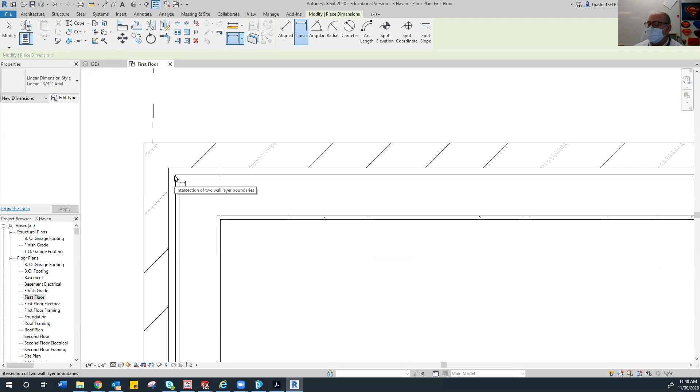So I click on that point right there, and I'm already into the dimension line. Now I go all the way across to the same point on the opposite side. That is called a dimension chain. The extension lines are the vertical lines coming up from the house, and the horizontal is the dimension line.

You need to visually pull that up so it's about what looks to be 3 inches, or maybe 3 fingers worth on your screen. So you put 3 fingers on your screen about that far away from the closest wall. That's an eyeball thing—no one measures it. So about 3 inches, about 3 fingers, plus or minus a finger. Some of you have fat knuckles, you pop your knuckles a lot.

Okay, so that tells me I have a distance of 81 foot 2. If you're doing brick or stone, that's good—you want an even number. If you're doing siding or stucco, it doesn't have to necessarily be even. They can work that out with that type of framing. But for masonry, they want it to be that way.

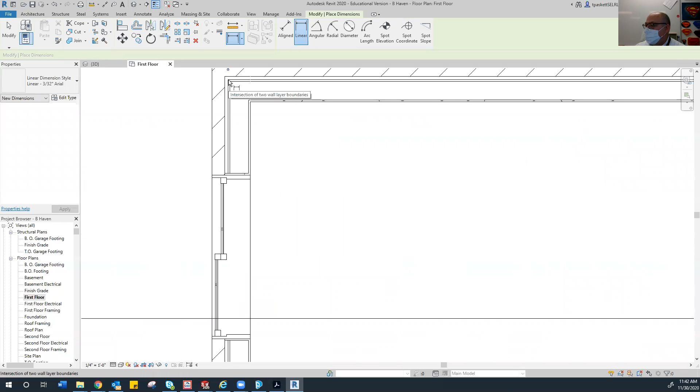Now you do that on all the other sides as well. I would not include the porch in the overall. So if I'm going to do this side here, I'll get my point, start with that side, come all the way down, not to the porch, get that sheathing line, and then this one will come out again about 3 inches eyeballed from that side. The porch is dimensioned separately on the next run of dimensions. Then I would do the same across the front and on the right side.

Now, because of time, I'm not going to do the whole house dimension—it does take time to do all that. I will show a video, I'll make a video this afternoon and do the whole house for you. But for right now, I want it to be a sketch there. So again, this is your overall dimension—it is used by the excavators and the foundation crew. The excavators then take that number, in this case that 81 foot 2. This is a very large house.

They take this number and add 6 feet to that, 3 feet on each side, and dig a hole. That hole must be 3 feet wider on each side of the house so that when people are down there working on the foundation, the soil doesn't fall back in on them and kill them.

If you watch your news feeds for Utah, it averages 1 person every year that the excavated dirt falls back in on. Last year the guy was very fortunate, it got up to his throat. It did crush a lung, but they were able to get him out of the dirt. They did not follow OSHA requirements, did not have bracing, and that happens.

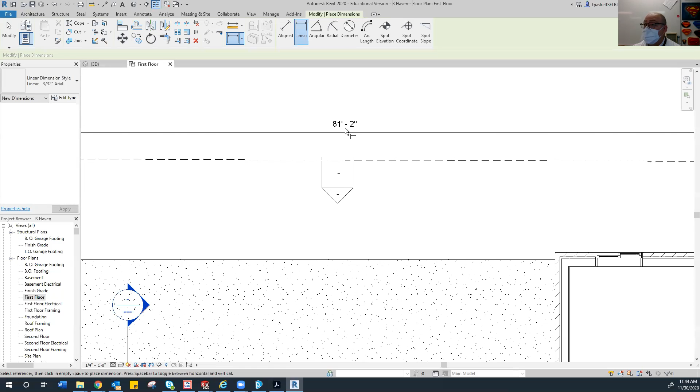We want to make sure we're doing our part of the drawing so that it's not on us. We don't ever want it to be on us, okay?

Now the next set of lines we do is for all the corners, because the foundation guys need to know every time they need to change direction for the foundation, and the framers need to know how long the wall is, because each wall is built independent of the other. So this is how easy it is to do a string of corners.

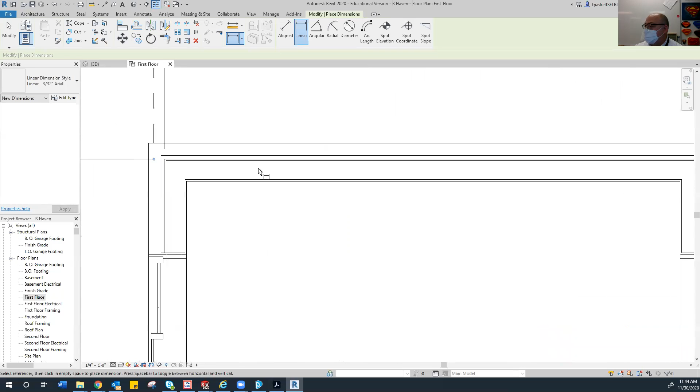I come down, I start with my exterior sheathing, go to the next point. I missed that one, it looks like. Go to the next one. As long as you don't hit your enter button, which is your right click, you can just keep picking points.

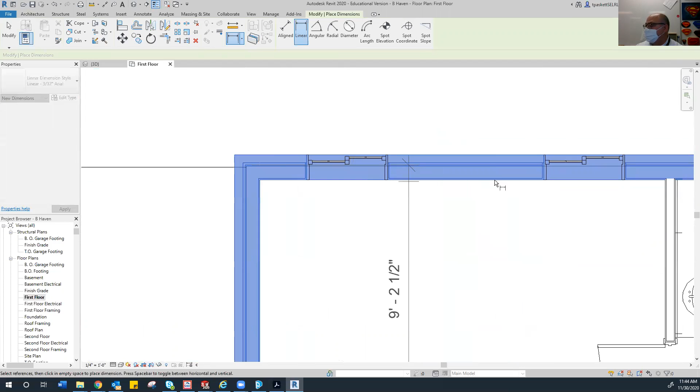Your dimensions will flip around on you doing this - don't panic. There's my last one. And then when I pull this whole string up, it comes up so it's just underneath your overall, and that's a full string.

We want as long of a string of dimensions as you possibly can every time you dimension a wall. So all the way across there. Okay, now we know that this wall is 13'1" from sheathing to sheathing.

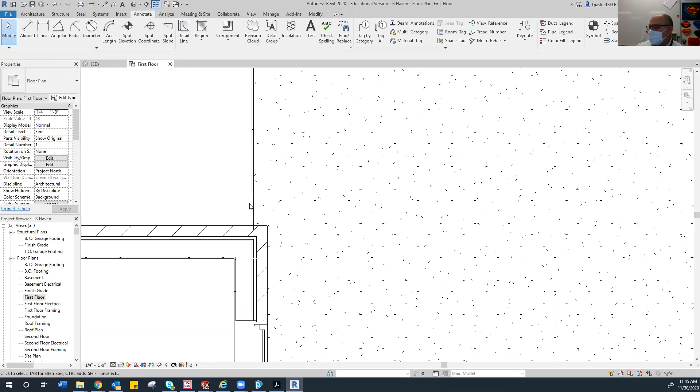Now I noticed there's a half inch here, and when I was working on this I also noticed that this guy was on the face of stud. So I'm going to modify this dimension right here. I can find that dimension. Oh, I see what I did - that's not dimension, I'm good. I did okay, I thought I screwed up.

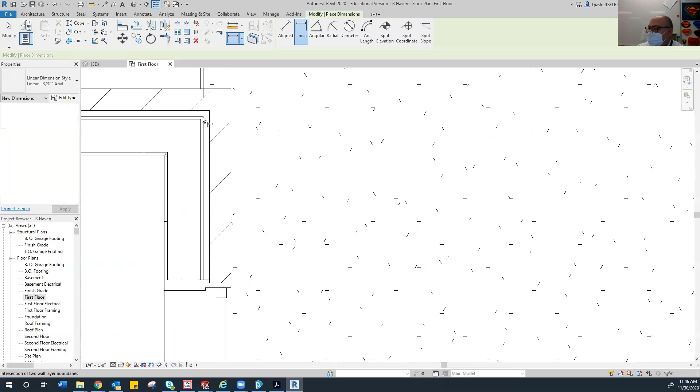Next, if you've got an area like this right here, I'll show you that right now - that's going to be pulled in separate. So you might have to go in and add information that's needed to build out your walls. So that would be a dimension that would sit here.

And if these walls line up, you're good, but if they don't, then you'd put another one here. If you just put the one dimension, it's implied that this wall lines up. Now there are some people who say, I can't take the risk, and they'll just go ahead and put the other one in. I want them to line up, so I just let it go.

Now I also have a window in this wall, and I have windows along here, so your third row of dimensions is for windows and doors.

Okay, now this is where it gets to be a little up to you how you want to do this. Some firms will dimension to the center of an opening, like a door or window. Others will dimension the outside. I like to do the outside - it saves me work later on with sizing out my doors and windows.

So this is what I would do, and notice I'm now in the modify - I still have my dimension. I can switch back to annotate, still active. So it's active in both the modify and the annotate at the same time, so you can get to the dimensions either way.

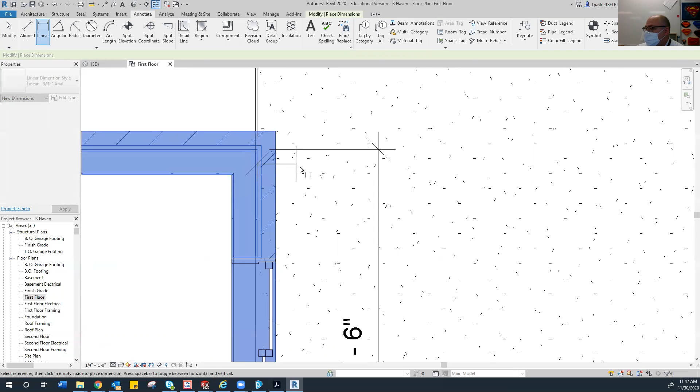So coming in, I'm going to pick up from where I was started. And when I do windows, I really don't like clients changing window size, and the reason is your windows have to equal 10% of the square footage of that room for light. If they mess up the size of those windows, they may make it so the house doesn't get occupancy, and so I try and lock them into one choice.

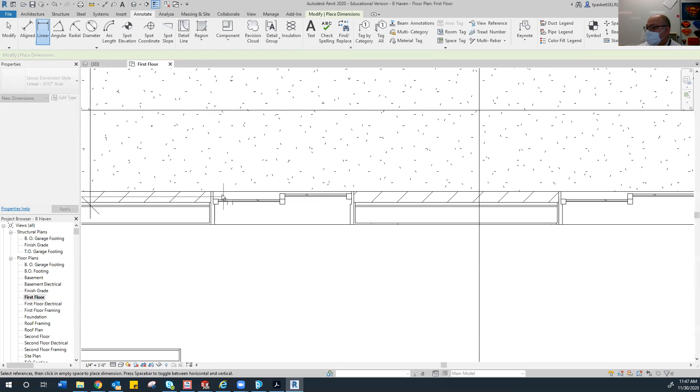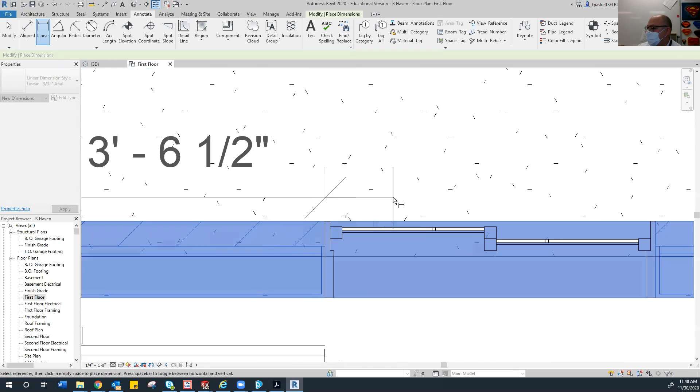When I come across to do a window, I'll go to the line on the outside, pick both of those, and keep coming along to get the other ones. I may check to make sure I got them. It's kind of a faith drawing exercise, a little frustrating. Back up to this point, over to here, and going across the outside edge.

As long as you don't hit that right mouse button or the enter key, every time you click an endpoint, they're going to be added. Does that mean you're going to be perfect? Absolutely not. Some of you will have to start over. That's a little bit of a downer, but that's okay. Like I just messed up. Oops, that's okay. Messing up is good.

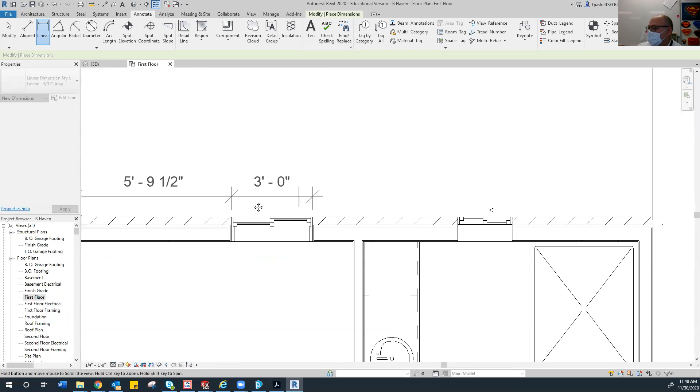I can try to fix that, because you'll need to know. This is a little window in the bathroom, so it's very tall and high up. Oops, I really messed that up, I just lost the whole string. Yep, I hit my right button as I bumped the mouse.

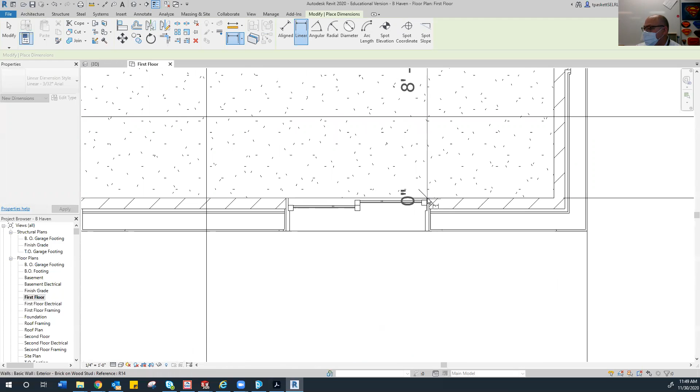So like you, I have to start over. This is where you want to take your time a little bit. Don't rush this. If you're worried about it, and you aren't doing teaching, it's a little easier not to make mistakes. I usually kick these off pretty quick and easy, but occasionally I get talking and lose my way. Okay, here we come again.

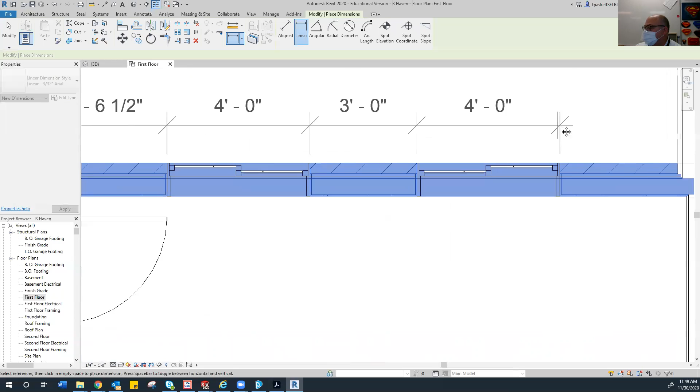If I miss an endpoint, that will kick me out as well. If you double click your left mouse button, that will also kick you out. But once you get the hang of it, it's actually kind of fun.

And it's a lot easier than the way we used to do this. In CAD, we used to have to do each piece separate. That was kind of a real pain, to be honest, because you have to make sure your strings all line up.

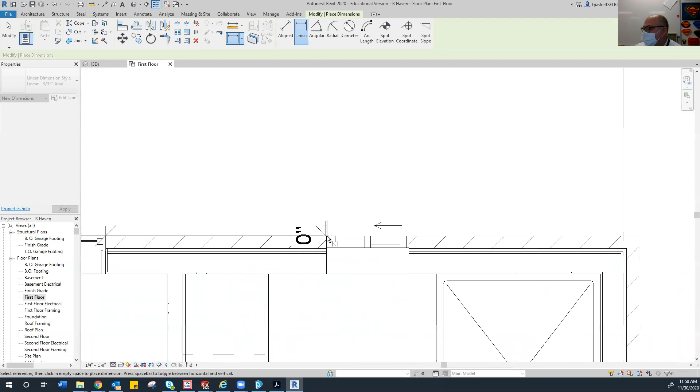Oh my gosh, well, we'll call that good for now. All right, so I messed up, so let's do some fixing. Okay, I at least got my string started. I messed up over here because that guy's not really there.

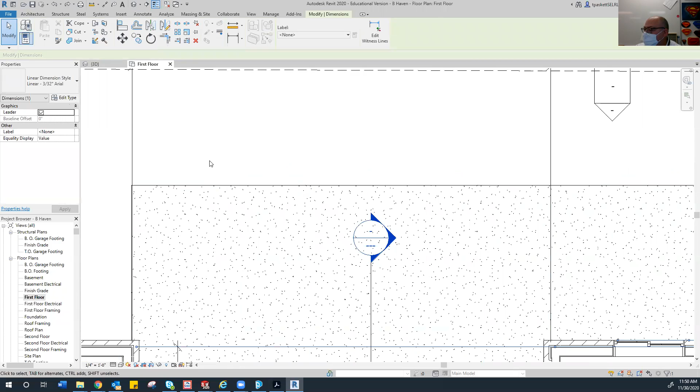When you place your dimension strings, you can take and modify them, and they are all linked. So when you want to make a change, you can move them all at once, if I'm careful. What am I locked to here? Somebody's got me locked. No, we're not locked.

So I'm going to take this middle line here. This is what lines up with where you're at on the middle one, which is kind of a weird deal. I should just be able to move that whole thing. It is not cooperating today.

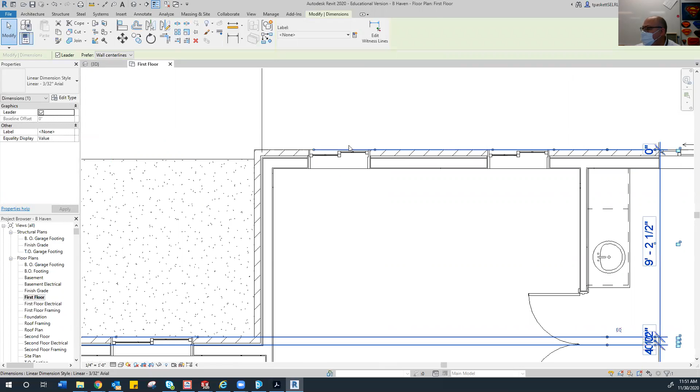That was really getting frustrating and getting bummed. Boy, that is frustrating as crud. I want to drag those up, and they keep flipping over here to the edge. So I've got to figure out what I'm doing wrong here. It's always fun when I do something wrong.

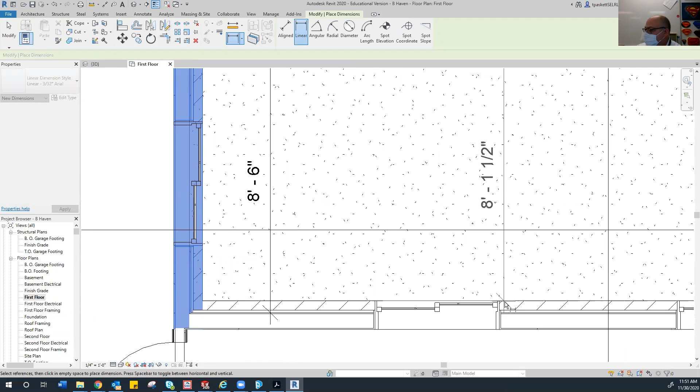Jeez, that is weird, okay. I don't want to do that again, but I'm going to do it again. So I'm just going to start over because it's frustrating me. What's happening is when I hit this wall right here, I'm inverting the dimension. There's a dimension going vertically here that I didn't want, and it did, and that's what's caused my grief.

So a little bit of knowledge doesn't save you. You can have all the degrees in the world and you still mess up in life. Okay, so I'm going to pull this string up to where it goes, and I'll let that one be, and then I'll start another string, and so I can fix that problem.

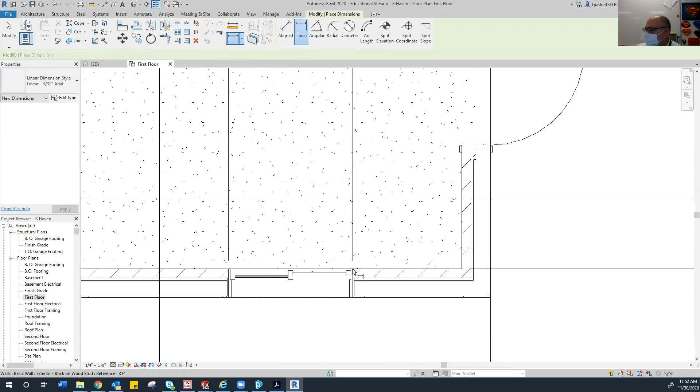If you need to do this, there's no shame in it, just because you have to break it up. What you want to do is just make sure you line them up so they're all on the same string, and you're good. You just carry that across, and that's all your doors and windows.

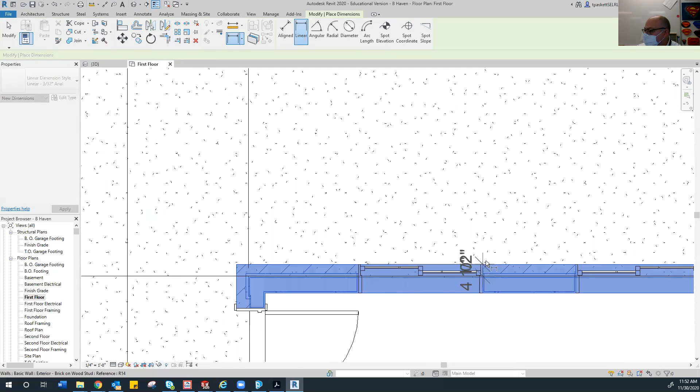I'll go ahead and finish that one out now, so we can keep a full string going in our discussion as we dimension. This is probably the most important part of your drawing, that these dimensions are all in there. Now, in the good old days, before you guys were even thought of, because your parents weren't, see, there's my dimension change.

So I'm going to stop this one here as well, and we'll pick up again. Actually, that's probably enough—you've seen me do it 14 times now.

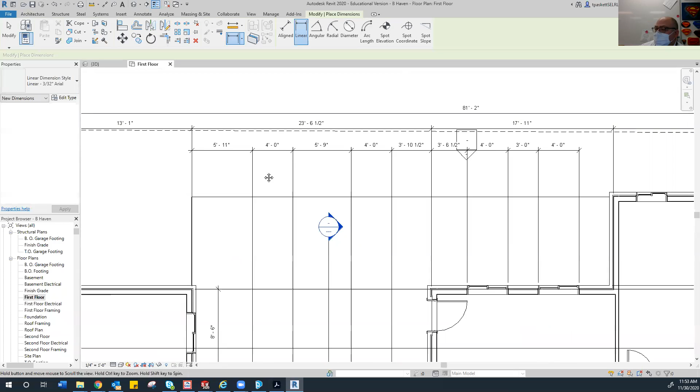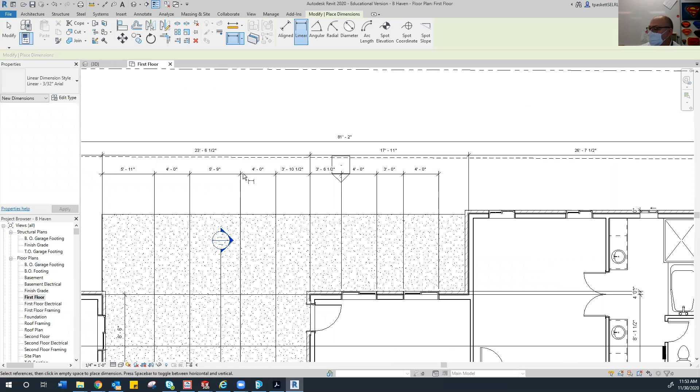In the old days, we did this by hand. When you did a string of dimensions, say 81'2", the next one down had to be added up and equal 81'2"—it had to equal. And the next string had to equal the first two. We can trust CAD a little more to get that right for us, but you still want to make sure nothing looks odd in your dimensions, that you haven't missed a line. If you've got half inches you're not sure about, check those and find out why they're there. If it looks right, you're good, but just verify, okay?

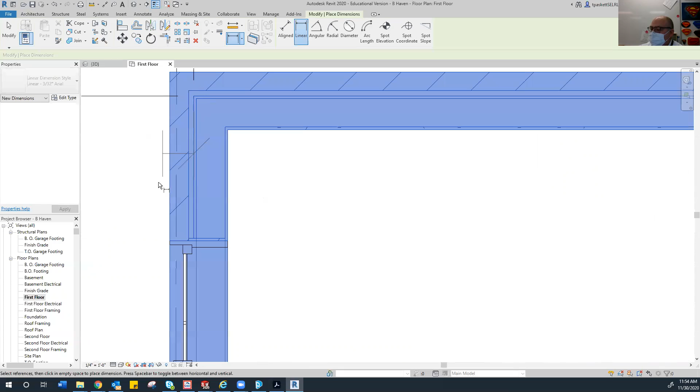So you do these three strings all the way around. Here I've got my overall dimension. There's no corners here, so I won't have three at this point—I'll have the overall, and then I'll go right to the windows or openings. I'm going to do this side because there's another level, a 4th level, that we're going to talk about real quick here as we go.

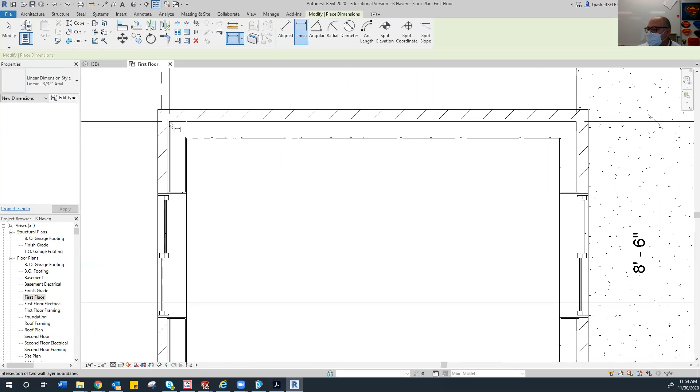Forget those short windows. What's happening on that one, so you know, is that window is above the cut plane line, so it doesn't want to show here. I've got to fake that one out a little bit—I forgot about that guy.

Okay, so this window here is above the 4-foot point where my house is cut through. Your floor plan is a horizontal section cut, and everything above 4 feet doesn't really exist, but you can see it. So I'm going to pull these out, and I'm going to stop here for a minute.

I'm going to go into my architectural tab and use my model line. I'm just going to grab a line right here off of that. And you want this—sorry, let me change this—not your center line we used on our property. We want it to just be a line, because if we forget to delete it, we don't want it to print. So there's a green line there.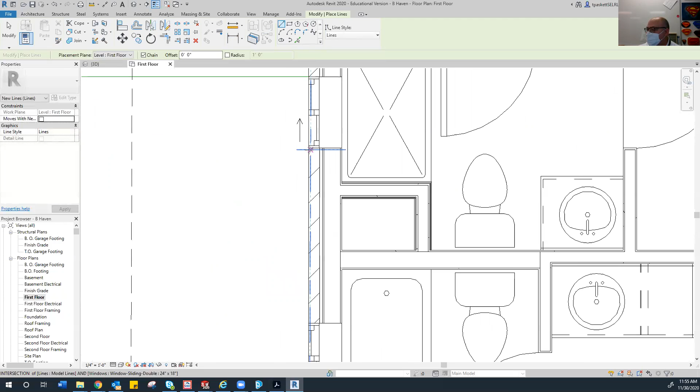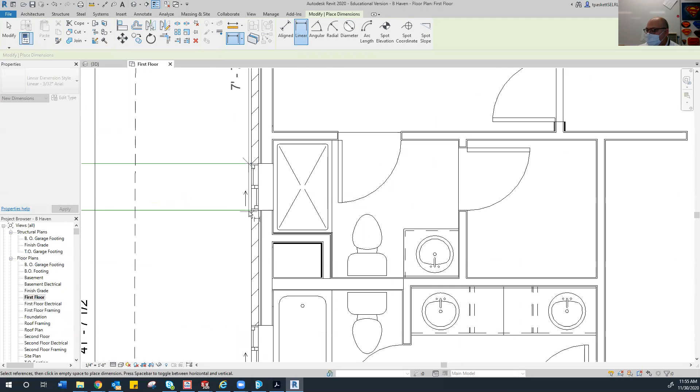And I'm going to bring a green line on this side. So now those lines exist because these are at the floor level—they're not at the window level, they're actually the floor level. So I can go back to my dimensioning, pick up where I left off, pick up on the line, and now I don't have that issue. I can pick up the next one using the guidelines and not the windows.

I've got the same thing here, but I'll just jump down—actually, I'll call that good. Line those up. So that's how you fix it when you have these bathroom windows up above your head, okay? Now I usually go back through and make sure I delete those out, but if you don't, that's fine—I'm not going to print it, so don't stress over it. It's not worth the anxiety of it all.

But occasionally we might want to put a 4th line in, and that would be if you've got a wall coming to the outside. I do not dimension this way, one, because I think it's a little too cluttered, and I'm asking different construction crews to do different things. The outside walls are done by the main structural framing crew—they'll build these walls on the floor, tilt them up, and then move to the next house. The secondary framing team comes in and does the next framing, and they're maybe a little less proficient, a little newer on the job, so to speak.

But we can hide mistakes on interior walls that we cannot hide on an exterior wall. So a lot of times a general contractor will have different framing crews. What some firms will do—and again, if you want to dimension this way, that's your choice, it's not what I do—they will dimension a string that goes from the corner to the wall, and you want to set it up so you're dimensioning to the center of the wall. This is why I don't do it, because it's a different setting, and I'll just eyeball it maybe if I can get that to work, and it won't do it that way.

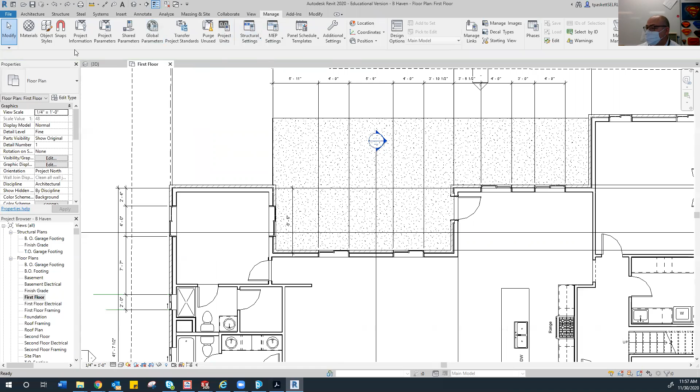I'm going to go into my additional settings, go down to your temporary dimensions. What I want to do is set the walls to go center core, and on the openings, go center lines as well there.

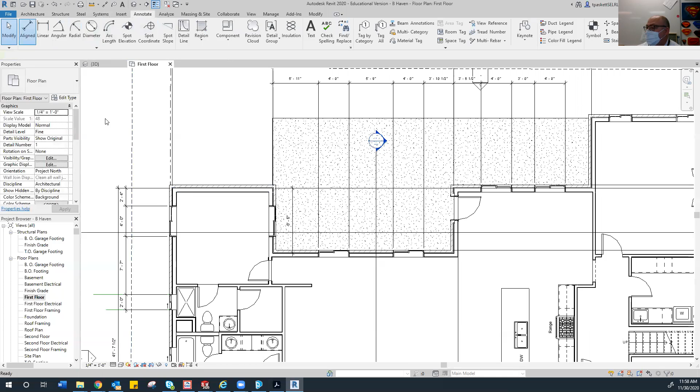Then when you do your dimension, if all is well in the world, you can dimension from the endpoint. You still have to go from an endpoint to start. But when you get to your wall, hopefully that'll kick in... should grab the midpoint of the wall there, and it's not grabbing it.

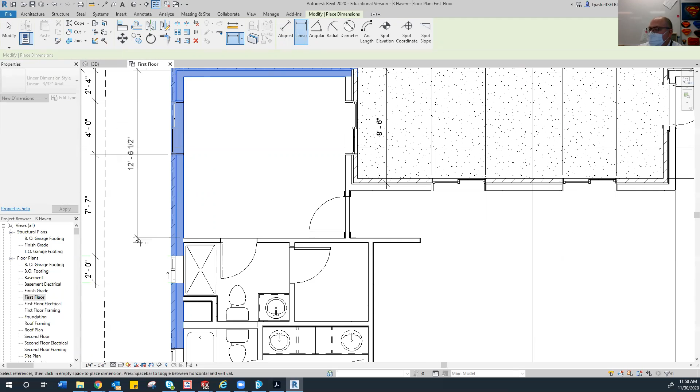Oh, wall center line right there, let's go center core there. Sorry, so again, you've got to watch your settings here a little bit. It's kind of a little bit of extra work in my world. So I go along here, and I want that center. I'm just going to grab the corner because I'm trying to find it. And your dimensions, that's one of the reasons I don't like it. It also doesn't give me control over my room size. But if you want to, you're welcome to do it that way.

So all four sides, minimum of 3 levels of dimensions: your openings, your corners, and your overalls.

Then we have the interior walls we have to do, and this is how I like to do mine. I'm going to go back and reset my settings. Manage, additional settings, temporary dimensions. I'm going to go back to faces and openings.

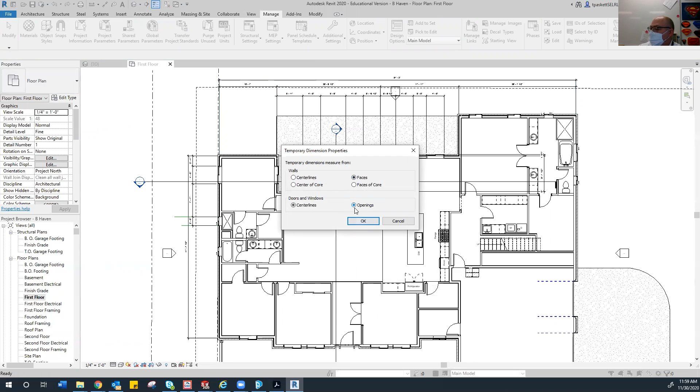Now, before you get going, let me explain. The only doors you dimension are exterior doors, your garage doors, and the doors that come into the house. Those you dimension because you have to know their location right up front. Interior doors you do not dimension. As a general rule, they are 3 to 4 inches from the corner, and that's where they'll be built. So unless you want that door specifically centered in the wall, then you would dimension that. But if it's just by the corner, you don't have to dimension. It makes it a lot easier and saves you a ton of time.

So like this door here, I would probably need to dimension its center location so it was centered in the room. You have to be very deliberate about whether it's from this wall or from this wall that it's centered. That's a design choice you have to make because they'll both result in a different configuration of that door. Okay, so I'm going to run a string across here.

What you want to do is run the string where you can get the most walls possible. This wall is kind of standalone, but this wall here goes along the whole length. So let's just do it. Maybe you'll understand what I'm trying to say in a bad way, what we're doing here.

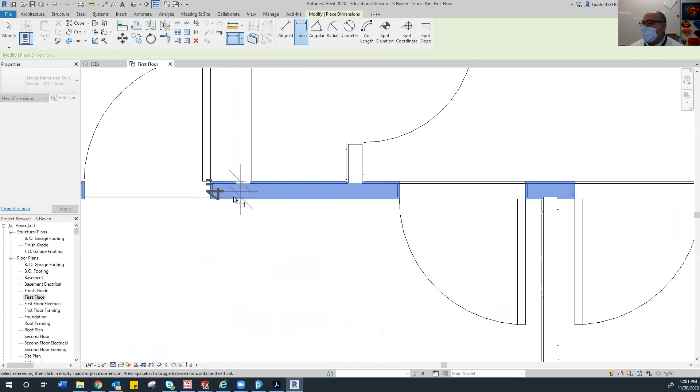So I try and pay attention where I'm grabbing. As I come across, I'm doing all the walls that go up and down vertically. So the next wall would be right here, and in order to keep my chain consistent, I'll do both sides of that wall. Then I come across, oh, there's another wall, let's grab you while we're going.

Thanks for coming along the train, choo-choo train here. Come along, there's another wall, grab that side and that side. Come along. Oh well, let's see - if I put the string here, well, I better grab this one too.

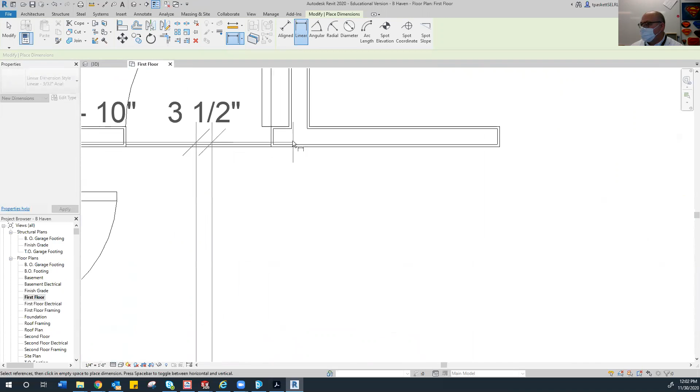So I grab that wall, keep moving myself along there. You have to maybe play a little bit here to get in the right spot. Down here, both sides, going across the closet area. See, I'm getting the 3.5, which is my stud thickness, which is good. Keep going. Life's looking great, jump all the way.

Oh, now it gets a little more complicated. We've got one down here.

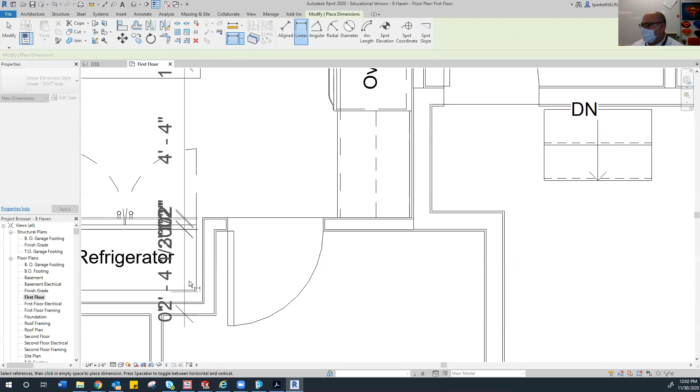And then jumping up here. That does start to get a little cluttered. They're all bunching up on you. Now we're at the exterior, and I'm going to stop here. I'll do the garage separate.

Okay, yay, I got those all messed up. The reason that gives you grief is I changed from interior walls to an exterior wall. So it kicked me out, but that's okay for what I'm doing here.

Now, you don't want them all lying on the wall line. That's really bad. So I'm going to pull them up a little bit here. It looks like they're going to go. And I need to remove the reference line. Okay, so that just says I can move them. And we'll delete that element.

Okay, so now I should be, whoops, that's my 4. Now I got to select without selecting. How's that? So much fun. Stupid teaching. I really should just redo this whole string, but what the heck?

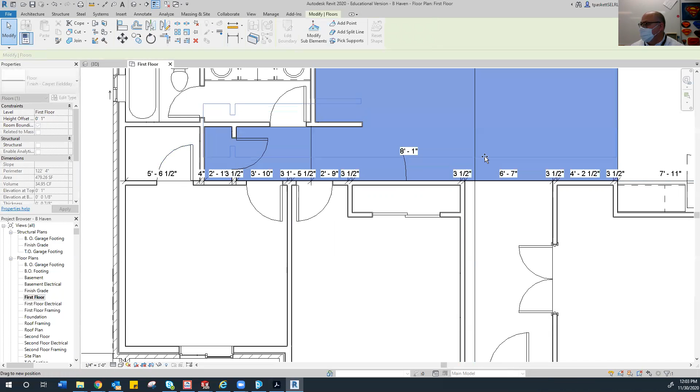All right, what I'm going to do is hide that floor because it's causing me grief, just to make my life easier. Now I can move that chain up. And if you need to do things like that, don't panic, just do it.

It's not bad. This guy got a leader. He doesn't need a leader, but he got one anyway. So pull him back down.

Okay, now let's talk about what I've got done here. This is a very muddied set of drawings. And first thing I notice, I've got a 4 and a bunch of 3.5s.

Okay, so if I look at this dimension right here, I can see I did not put that where I wanted it. So the fix is not the line where it crosses, not this dot here, but the other one up. And I need to move that over. And that's not an easy thing to do, so it takes me longer than I need.

And I'm going to use a modify, and hopefully I get to a line. Oh, I changed that, didn't I? Yay. So we're going to do faces of core. And I'll try and get that to line. Oh my gosh, I'm making this a lot more work than I want to.

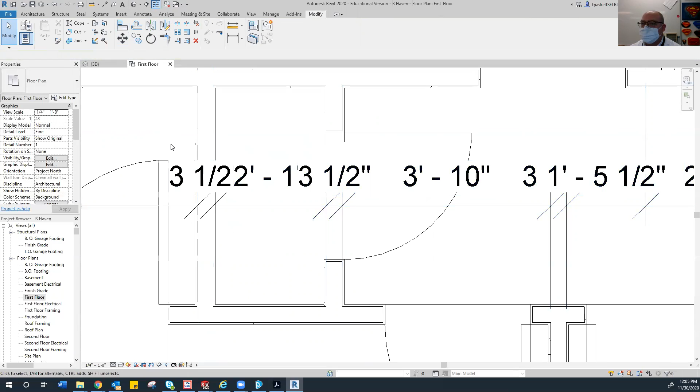So this is going to come over to here. There, that fixes it. So you might have to move your settings around a little bit as you work it, or just take your time.

Now, as I look along here, this is almost impossible to read. I cannot read that. So I know that I have to dimension interior walls once each time they change, because visually this 3.5-inch wall is not that thick. Okay, I know it's not that thick. I know it's a 2x4.

So I have to make some choices here. One is I can take the text and I can pull it out and over and let a leader line drop it down in. And I can do that anywhere I choose, provided I have room to do it.

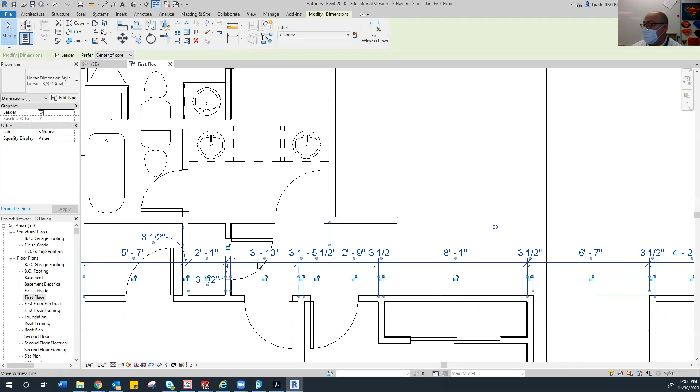If you say, well, I only need to show it once, which is what the standard is, and you want to delete one, you have to remember you're part of a full chain here, and you would need to break that chain.

And to do that, you would want to... oh, where's the dang... oh, I want to break the constraints on them. Select Previous. Usually brings up remove constraint, and it's not bringing that up for me, so I'm not sure what's going on today.

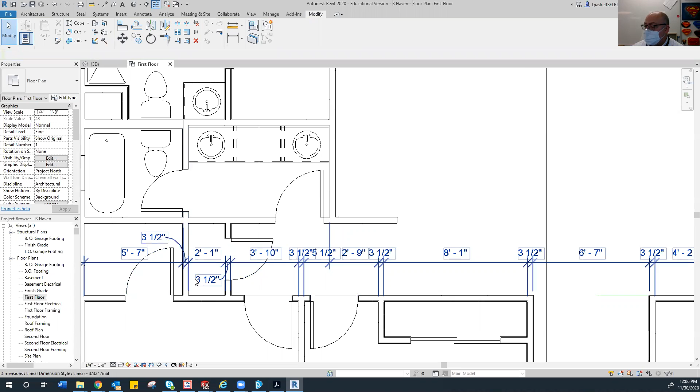So the leaders make it readable, and if that's what you end up doing, that's really good. That's what I had the class on the Thursday before—well, what was it—the Tuesday before Thanksgiving. I had them just do this.

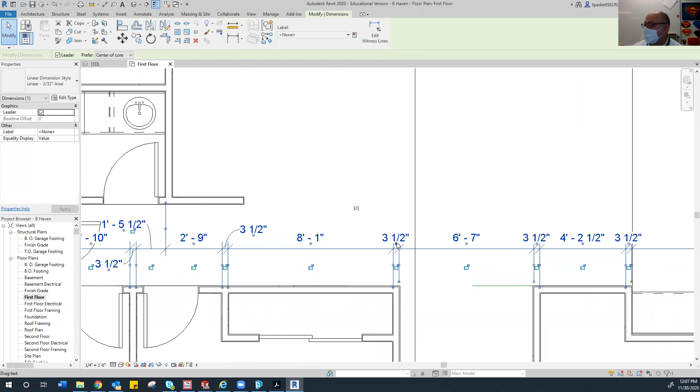Come along and use your leader lines, because it's just a little less work for you guys, and especially since we're now in kind of a crunch mode. We are off my original plan for the year. We're about 2 weeks behind as a class, and no fault to you guys. It's mainly because we start and stop and go back and forth.

So just make sure that as you come across your dimensions, that everything's readable. And if it's not readable, make it readable. Whatever you need to do to make that happen—that still isn't very readable, so I'll pull another one up.

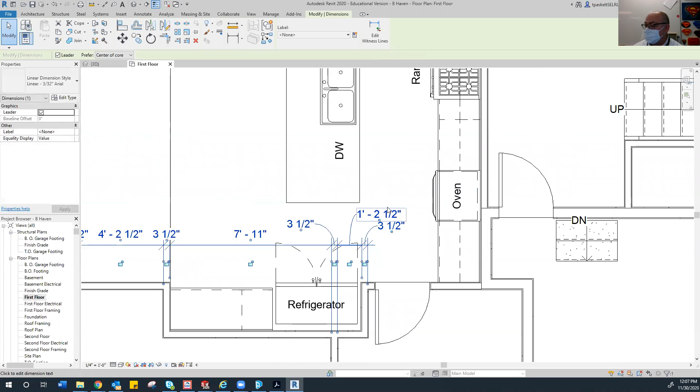Now we have to be careful when we do this, especially in a room like the kitchen. I started to put electrical stuff in here. So know that what you do now, you might have to modify a little bit when we put other things in there. Okay, so that's what a horizontal string would look like.

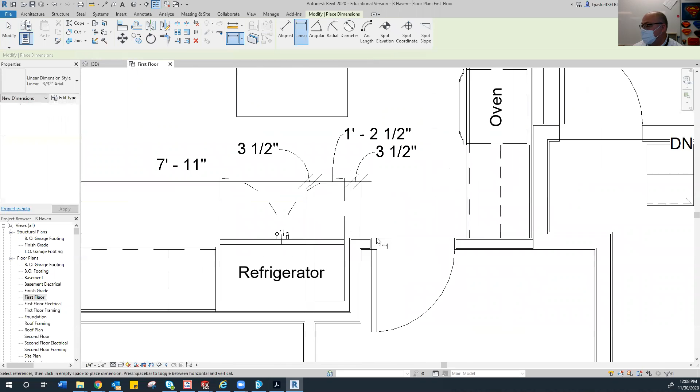Technically, it should go to this wall here, and I could probably add that in now that everything's set, and it's going a little bit easier. Missed that one. That's okay, I'll fix it.

Line them up. If they're not right, take the middle line and shift it to where it needs to be, so you can line them up. It's that middle dot, not line, middle dot.

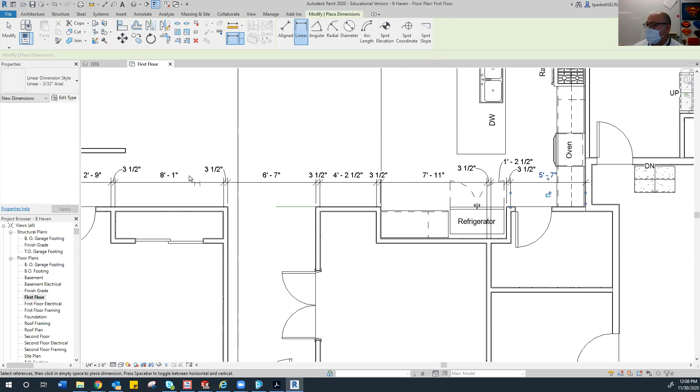Okay, so long lines going across, get as many walls on one string as you can. And I missed that one. Oh, I did bad on that one too. Okay, so I missed the other side of this wall. So I can modify that one. Might as well show you all of that.

This side here, then go over to here. And I noticed that went the wrong way. So let's go back. The middle dot is back to here. And what I might need to do is lock this one and lock this one, so those two sides can't move. And then when I move this string here, they shouldn't have moved.

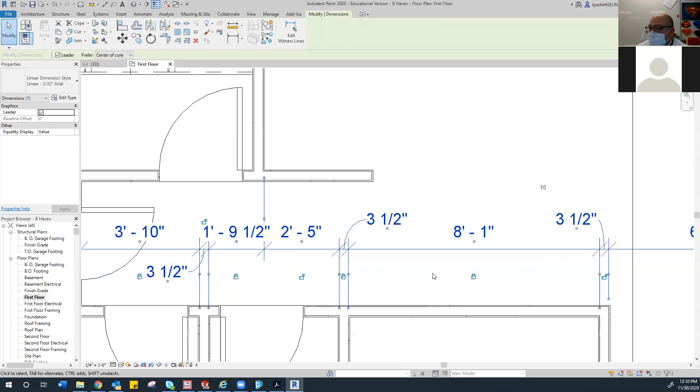Okay, and it unlocked itself. Okay, these shouldn't be unlocking. So there's something wrong in my settings, I've got to go and check. But when you lock them, that means these two won't move and this guy will. And typically when you put strings down, they all lock. And so if they're not, we can work on that one-on-one.

The big thing might be that you will see these not-equals. If they show without that slash mark in them, then Revit is trying to make every wall the same size. Don't let it force equal distances on you.

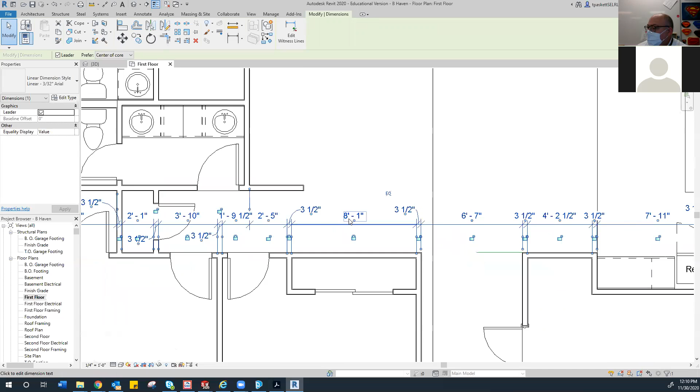Vertically, you do the same thing. You then go from an outside point and kind of plan where you're going to get the most lines or most walls dimensioned as you go.

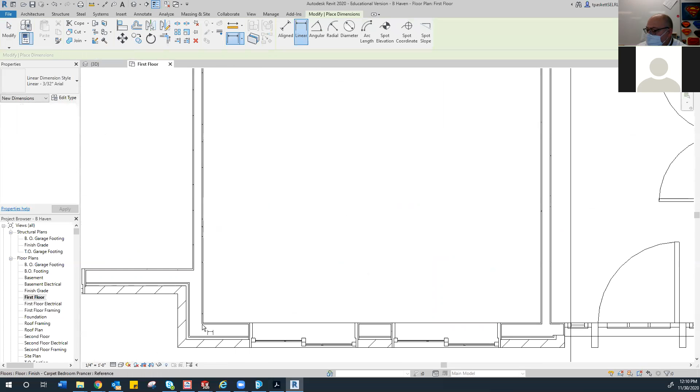So it's still linear. I'm not safe for right now because I've got to do some fixes on it. Again, start with your face of stud. And I'm going to go up right through here to the closet side of things. Maybe if it doesn't kick me out.

What is with this thing? It is really fighting me today. I'm not sure exactly why. It's a little unnerving. So right up along the string here.

Now I want that over here. I want to shoot right up the middle. I look and make sure there's no walls here that I'm going to get. There is a wall over here, but it's too far away. So I want to kind of be a little

focused. Oh my gosh. On what lines I get. And this thing is just so funny today. It's funny, I'll laugh and then I cry. You guys all go home because that's what teachers do when you all go home. We cry a lot. So pull this out.

And again, I'm going to have to do some fixing on it, because it's just easier sometimes to live with it or fix rather than modify. And I've got to find the right endpoint to grab onto.

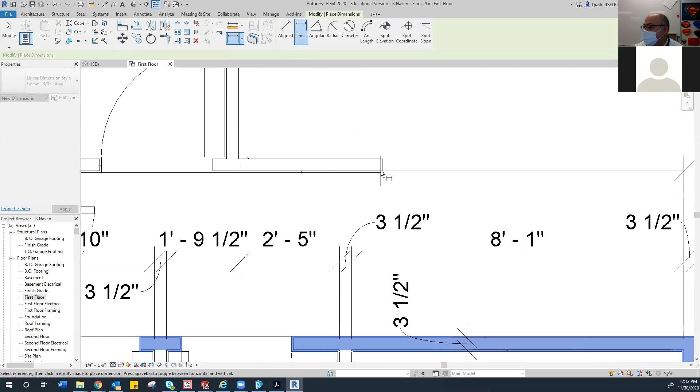And if you do have frustrations with it, I've been there. Apparently today is my big day. I'm so happy to be here with you all.

There we go. And I'm going to capture as many walls going as I can. And it's not very close. You want that black dot, whatever you can do to get that bugger.

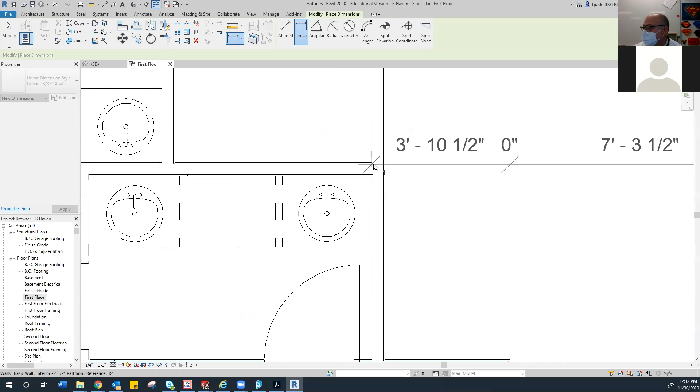That's me, your saving grace. I'm not going to worry about this in this string. It's too far away. So don't try and do more than you need. Well, whatever.

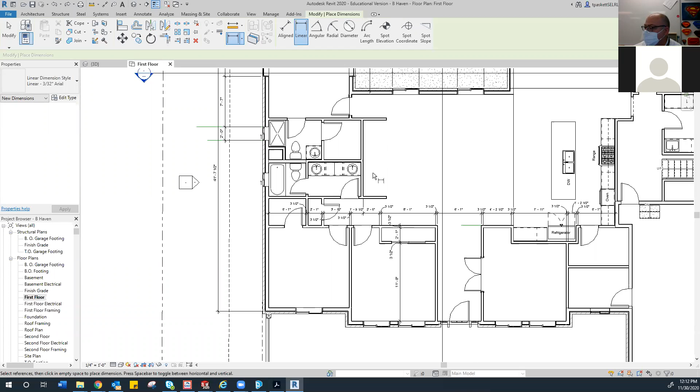So I should have demoed dimensioning. So this string would then carry across. I get this wall, and this wall. This little cabinet here—it's not a cabinet, it's a furnace flue, that's what that is.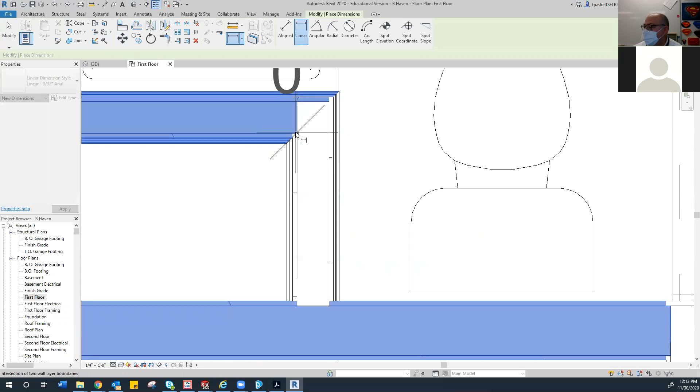I'm going to dimension that inside. I'm going to figure out why I put crown molding on the inside of that. That's probably part of my issue, is I've got my walls turned inside out. So on this, this would be pulled inside here to give that size.

And I do the interior size. Don't do the exterior on these if you have these on your plan, because the inside is what matters on these. This is the combustion air for the furnace. And so when you see those, they need to be a minimum for Utah of 12 by 12. So as long as you're equal to or greater than that, you're good. That's how much combustion air we need.

In Utah, because of elevation, we have less oxygen in our air than what they have in California because we're higher up. It's just kind of nature we're at. We also have less ozone because we're up higher, and so we sunburn easier here.

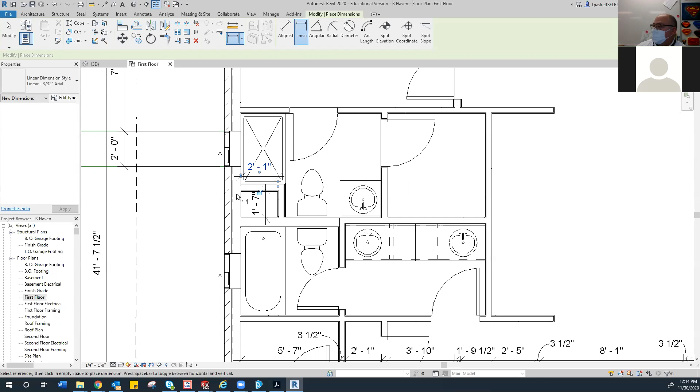You might have to do some spot dimensioning, but you really want long strings going across horizontally. This wall didn't get dimensions, so I'd have to do these two rooms separate from here. Then I run a string up here and get this wall and this wall, going to the outside. So you go from exterior to exterior on the interior and try to capture as many walls as you can as you go. Does that make sense? Good, so you do that on each of your plans.

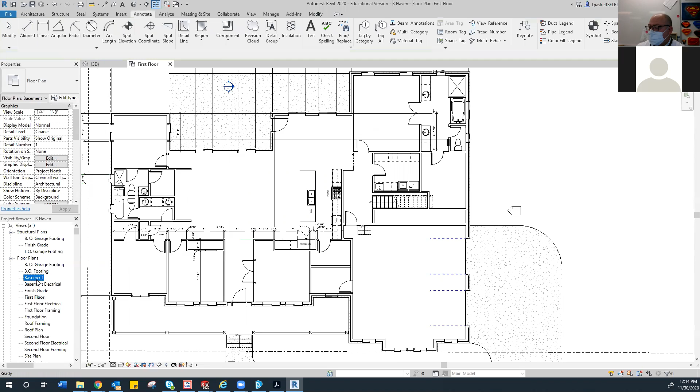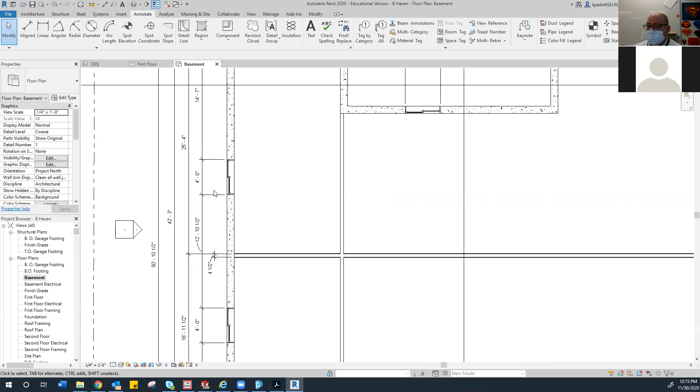I'm going to go into the foundation really quick because it's a little different, and that's on my basement here. If you're doing a crawl space or anything with masonry, you never dimension to the center of a window in concrete. So on your basement or crawl spaces, you never, ever dimension to center. The reason is, in order to put in this window, it has to be done before the concrete sets, because once it's hardened, it's a lot more expensive. So we need to know exactly where the form goes to make the window opening, and we don't deviate at all on that.

How many of you have crawl spaces here today? Okay, those of you with crawl spaces need to vent that space out, so we're going to add that in today. I'm going to use this area over here as my crawl space area. You need a vent within 2 feet of every corner, and no further apart than 12 feet, to get enough cross ventilation.

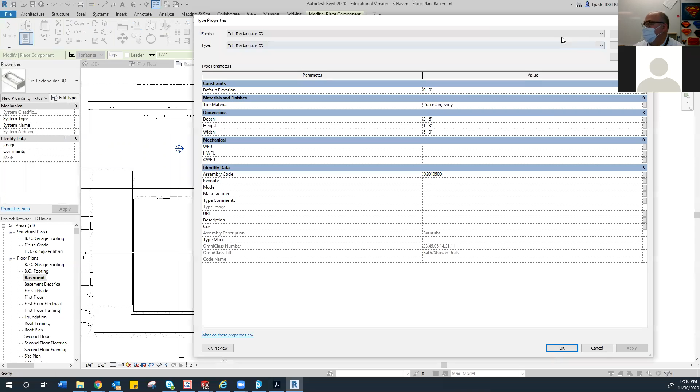So when I go into my components, edit type, and library to find these, it's kind of a mess. Vents are not in the Windows category, however, you can use a window for a vent. So it's in your structural foundations—oh no, it's not, it moved. Well then. This is one thing that changes with every version of Revit, so it's kind of one of those things. I'm just going to use a window, because that's typically what I do.

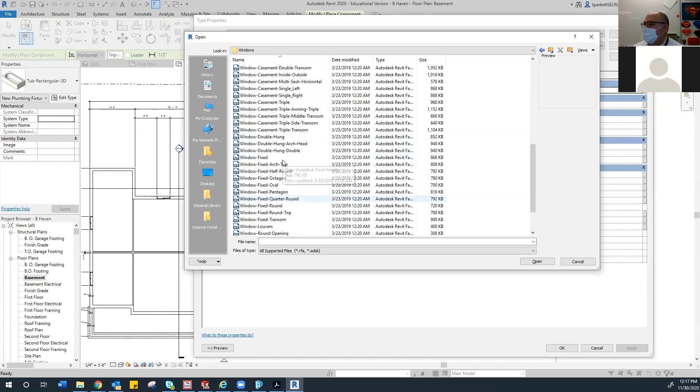So I'm going to go into my windows, and if I look through here, there's openings, fixed windows, a few of them in here, but what you won't see is a vent, and that's what I'm building. So what I want to do is create one, using the fixed window for that. I'm just going to show you how I do that, so I'm going to open that up.

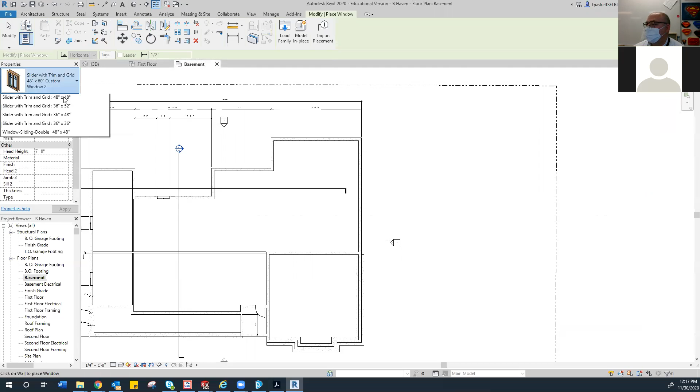I'm going to quickly—I know it's not the correct category, sorry, I got to switch categories, my bad, Architecture. Oh, Windows, Windows, yeah. Go back in and find that thing—fixed window, open that up, and then duplicate it right off the top of that.

What I'm going to do is make it an 8-inch, let's see, 12 inches wide and 8 inches tall. And the 2, I'm just going to change that to vent, V-E-N-T. I create one of these about every time. I don't do a lot of crawl spaces, especially in Utah, because everybody wants a basement, but you have to keep them dry. One of the worst things that can happen is you build a swamp underneath your house, and if you don't have airflow under there, that's what happens. So it's a 12 by 8 vent.

So now I'm going to come down here and make some changes. One is the height—the sill height's kind of problematic, we'll have to modify that. But on this fixed window, there are no sizes on this one, I used the wrong window. Okay, so what we need to do is, it's not going to be glass, I'm going to change that material out. The material I'm going to look for is a screen, to see if that's loaded on this machine.

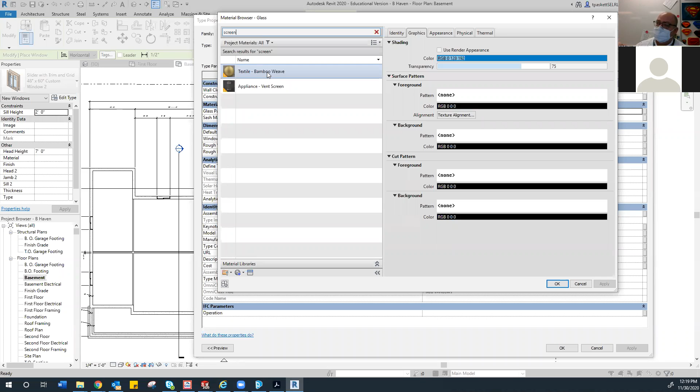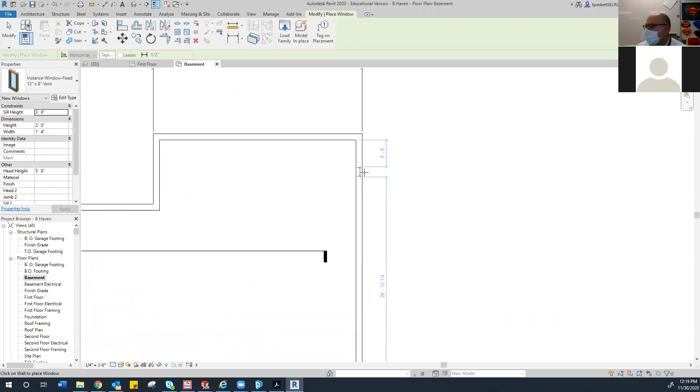I'm going to go and place one, and put it on the side here. They're just a little small, 2 feet from the corner, and there'll be one over on this side. I'm just going to do the two because I need to adjust these quite a bit. I guess I'll just do one. I am having a rough day, guys, I should have stayed in bed.

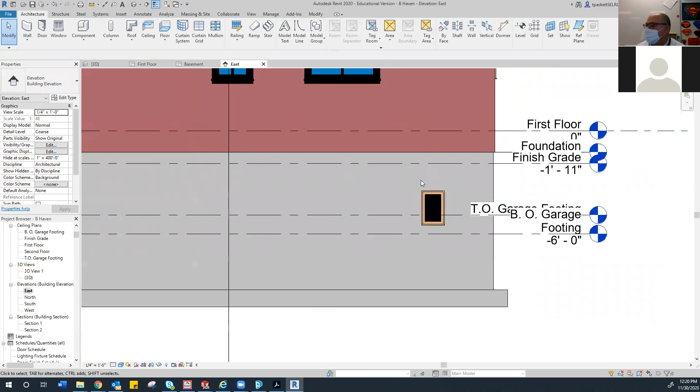So that is my east elevation, and there's my vent. This is why we need to adjust it. Here's the size of it all, and it's 3 feet off the basement floor. It's also way big, and I really picked those.

Oh, there's my sizes. So once I select in the elevation, there's my height. My height is 8 inches, my width is 1 foot. So I'm going to go and fix that. Do that fix first so we can see what it is. And it's going to go up.

So it's just underneath my foundation or my finished grade. I usually don't try and measure that, I highball it till it looks good. It's got to be above the grade line, so I'm going to go quite a bit here. Let's go 6 feet. Put that in, so I need to go a little bit more. I know it's 8 inches, so I'm going to go 6, let's go 6 to 8 on this one. It's a little high.

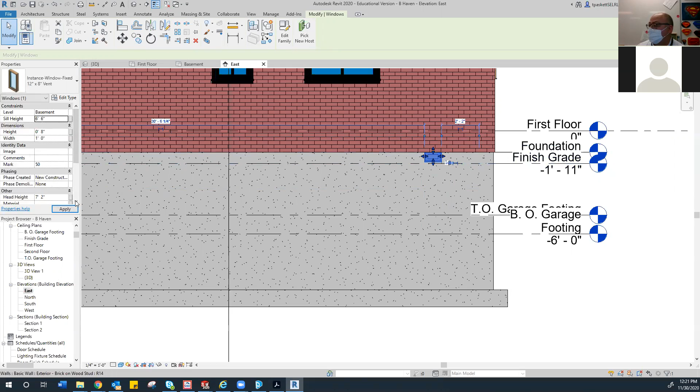And this is really what I do, I just look at it. I want it above my grade, but not up above my foundation. So there's my vent, it just sits there just like that. I don't worry about it, it's a purchased item, I'm not going to spend a lot of time designing it, I'm just going to put it in there.

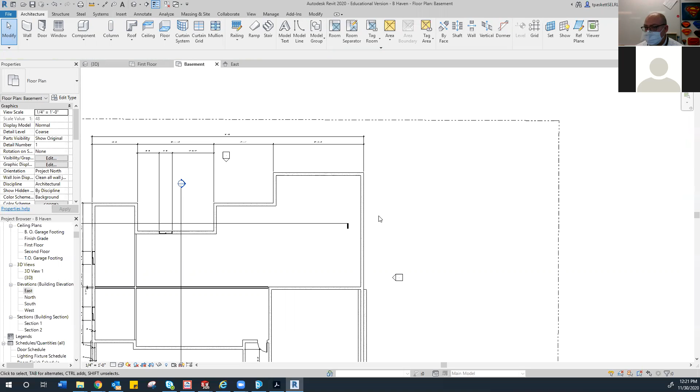Now, if I go back to my basement, here's the downside: it won't show here. So you put them all in first, then go around and put them where they go, okay? Again, 2 feet from each corner, all around where your crawl spaces are, okay? And that will give you enough cross ventilation.

If you have a front porch, you can go underneath the porch and vent that way, but you have to make sure your porch is vented. In other words, you can't have any walls coming down around your porch, it has to be above ground and vent out. So just get 2 feet from each corner and you'll have your vents.

And again, they will not show on your plan once you adjust them, so just be aware of that. They do show on the site plan, which is kind of weird, but we do have to show them in the elevations.